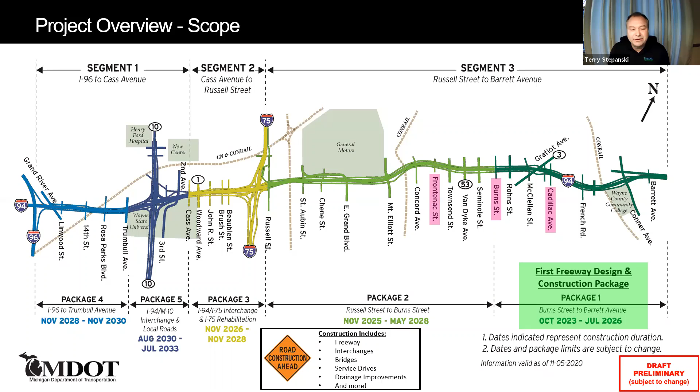One of the things we heard as we were working on the project is to increase connectivity. On the next slide, I'll talk a little bit about connectivity and what we're doing.

When we developed preliminary plans for the project, we focused on that very strongly. One of the things we're doing is constructing retaining walls along each side of the road. The previous rendering showed 3 lanes in each direction with narrow shoulders on each side. We're building vertical retaining walls on each side, excavating the earth, which gives us enough room to add lanes and wider shoulders.

From a bird's eye view, we really aren't making the footprint any bigger than it was originally. We're just using that same footprint in a more efficient manner. Stakeholder comments were so important here. We've been at this project a long time, and one thing we heard was that we needed to improve connectivity. So this project adds some bridges, which we call complete street bridges, that will accommodate pedestrians, motorists, and bicyclists, non-motorized traffic also.

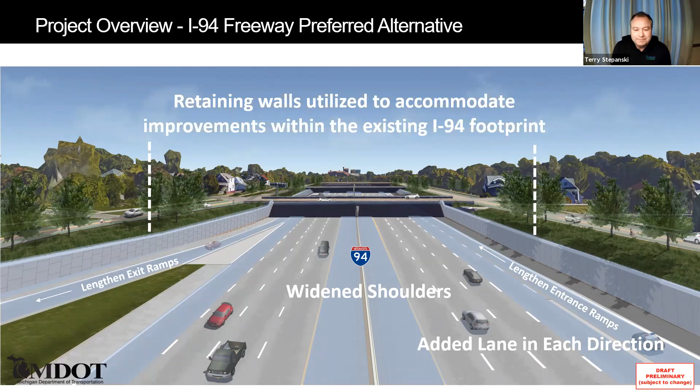On the next slide, we show that MDOT's been at this a long time. This is only a small segment of the entire project, showing the start of 2015 with the advanced bridges. We've really been at this project since the 1990s, doing work on it, and we had a conceptual plan back then.

As we updated our plans and met with stakeholders and talked to people, we realized we could improve on the conceptual plan we originally developed. So we continued our stakeholder engagement, took comments, and responded by modifying the plan. Our current plan includes greater connectivity and improved service roads. At one time we had continuous service roads throughout the entire corridor; we've modified those to only have service roads where needed, with more neighborhood areas along the freeway where that's most fitting, which fits in with the mayor's walkable community concept. So we've made those changes, and it really did help.

There was a lot of positive response from the public as a result of those changes. At one time, we had a lot of opposition to I-94, but as a result of listening to the public, making changes, and responding, this is an improved project that really fits into the community and meets the needs of the community.

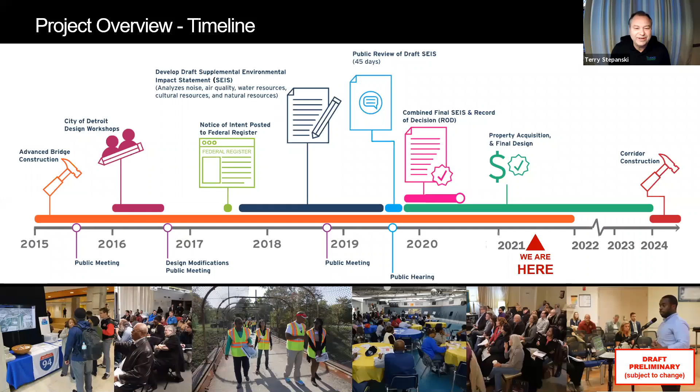Now we'll talk a little bit about the advanced bridges. This is some of the stakeholder engagement I mentioned previously, this collaboration with the city, and the city felt it's important that the bridges over I-94 provide connectivity and meet the needs of residents. So we do have bike lanes where applicable, and wider sidewalks accommodating vehicles, but they're not big wide bridges either where they're not necessary, or they're the right size to fit the approaching roads. We've had numerous discussions with stakeholders on that, so we certainly have it right.

Yeah, that's about it on that slide.

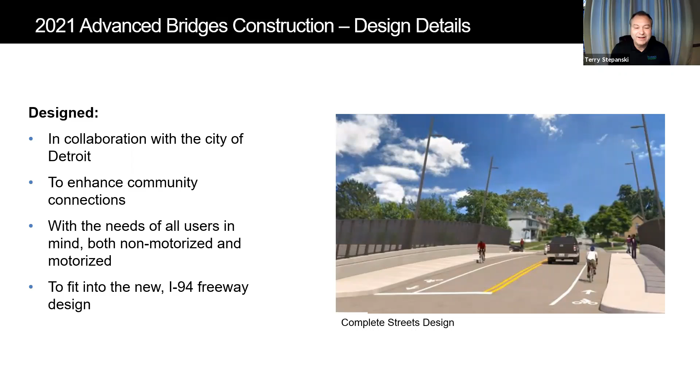Next, please. And what some other things I mentioned: the wider sidewalks, bike lanes, and blending into the community. And we do have decorative lighting up and down the corridor. You'll be seeing more and more of that as we move forward.

And another interesting thing, even on the aesthetics, we had a lot of stakeholder engagement workshops to seek input from the public just on how things should look. An interesting component of that is this constellation pattern you'll see on the walls of the bridges, and also when we build the retaining walls throughout the corridor, that they're in the shape of stars, representing the stellar navigation that was used by the Underground Railroad. So it's interesting, just a little backstory on where that came from.

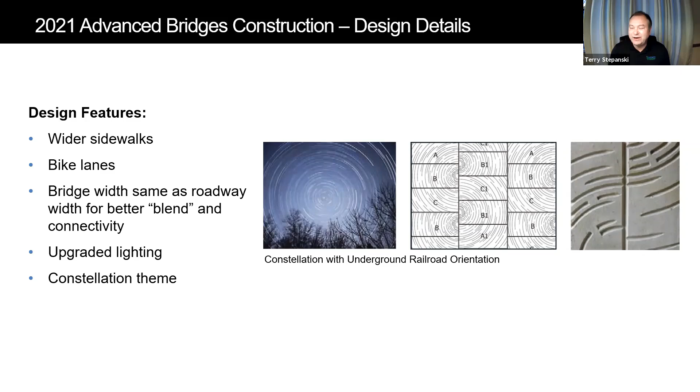So with that, we'll talk a little bit more about the details of the three bridges: Burns, Frontenac, and Cadillac. And I'll turn it over to Victor Judnic, our construction engineer, who'll be out there working to build these three bridges. Thank you, Terry.

Good evening, everyone. We are going to work, and we're getting a very early start on the three bridges, as Terry mentioned: Frontenac, Burns, and Cadillac, all over I-94. I'll just take a quick moment to mention the three bridges we're wrapping up from last year: Milwaukee Avenue over I-75, East Grand Boulevard over I-94, and Mount Elliott over 94. All three of those bridges will be open sometime this March.

So that's good news, we're starting early with the new three bridges. The reason we have to close those bridges now is because we're demoing Frontenac this weekend. We are going to be removing Burns next weekend, the following weekend, and we have a tentative date of the weekend of March 12th for the last one. Right now we're checking for asbestos, which has to be removed prior to demo. We have to take lights down, pull fencing, videotape sewers, videotape buildings, and put in vibration monitoring devices.

We're starting the fabrication of the beams of the new bridges that will be wrapping up in November. So the goal is we would open the traffic by Thanksgiving, and we hope to get there with these new three bridges, alongside opening the existing bridges we're still working on in March.

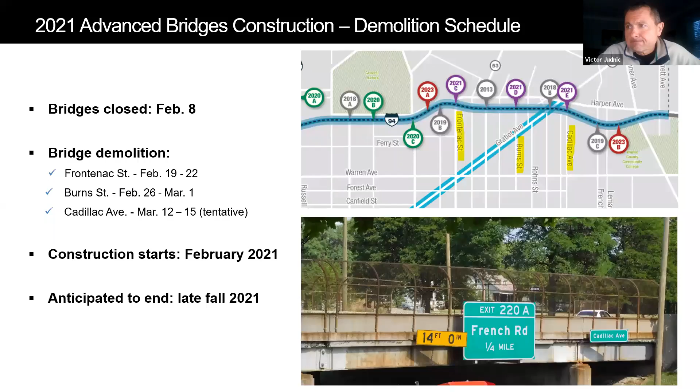Now this is a cross section, a slice of the bridges, what they look like existing and what they look like in the future. As Terry said, this is complete streets, where we've optimized, working with the city of Detroit, to keep the throughput of vehicles. We're not reducing vehicle traffic, but we're optimizing the space, adding bike lanes, widening the sidewalks, making the bridges friendlier for bikes, pedestrians, and vehicles.

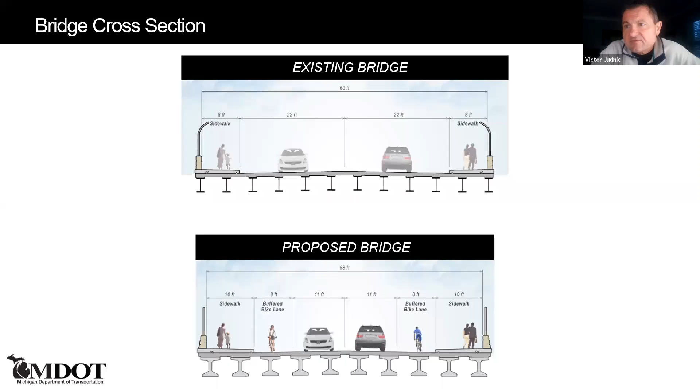I'm going to pass to our traffic expert, Mark Smith, who's going to give us a nice background on all the detouring that's going to be happening this year all around town. Go ahead, Mark. Thanks, Victor.

Yes, as Victor said, my name is Mark Smith, and I'm with HNTB on the I-94 project. As Victor mentioned, all three of these bridges will be closed for the summer, a full closure with detours for both pedestrians and vehicular traffic. There will be, out there in advance of the closures, turn-by-turn guidance for detouring traffic around those, and that is already set up and in place.

For the Frontenac Bridge closure, the detour that we have in place for both pedestrians and vehicular traffic is to use Concord, which is a bridge that we just recently constructed last year. In addition to the closure of Frontenac, the entrance ramp from Van Dyke to westbound I-94 will also need to be closed.

The reason for this closure is that while we're working on the bridges on I-94, we're making changes, widening the shoulders and shifting traffic around to maintain 3 lanes during all peak hours of travel. There will be some lane closures during off-peak times or during the weekends, but during your morning and afternoon commutes to and from work, there will be 3 lanes of traffic always open.

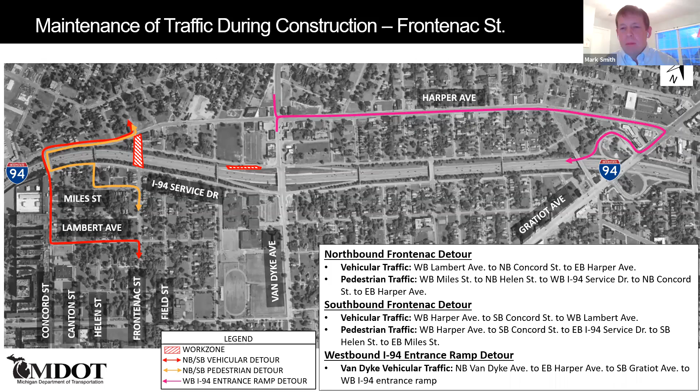For the Burns Bridge closure, again, the pedestrian traffic will be detoured to the west, and they will use the Van Dyke Bridge to cross I-94. For northbound traffic, the red arrow, we have them detoured over to Van Dyke, and the southbound traffic, the blue arrow, we have them detoured over to McClellan. Both bridges would obviously be open for northbound and southbound traffic. The detour signing is just placed in a way to eliminate left turns for the traffic crossing I-94.

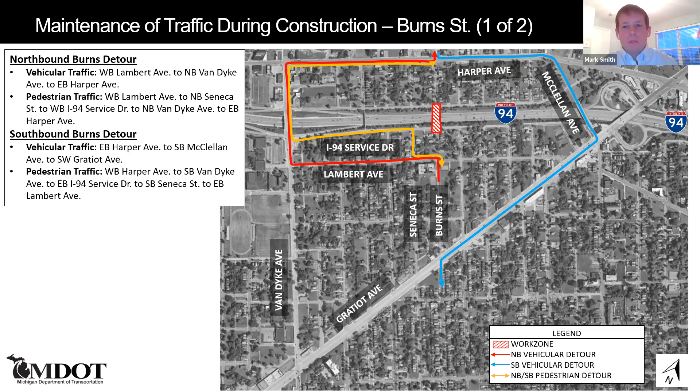With the Burns Bridge closure, there is another entrance ramp to I-94 impacted by this. This is the eastbound I-94 entrance ramp from Van Dyke. The detour we have in place for this ramp would be to take Harper to the east, and then you could enter the freeway at the Conner interchange.

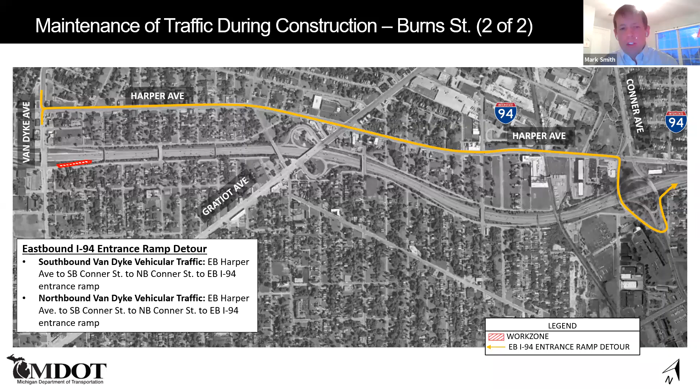For the Cadillac Bridge, again, the orange arrow here is showing the pedestrian detour, which would use the Gratiot Bridge, and the northbound detour for vehicles would use the Gratiot Bridge, and the southbound detour would use the French Road Bridge.

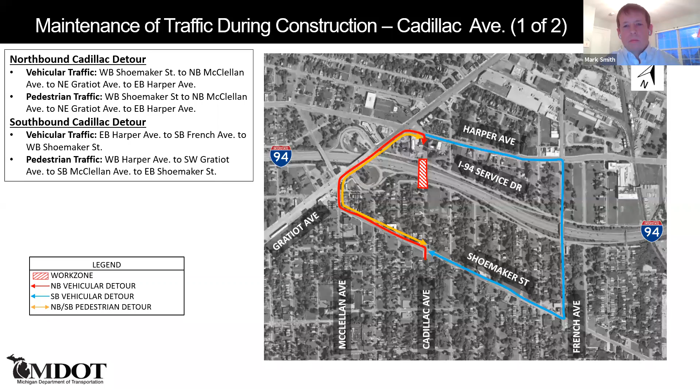Along with the closure at Cadillac, there are several ramps that are impacted. I'll walk through them, traveling on the eastbound side first of I-94. As you're approaching the Cadillac Bridge, the eastbound I-94 exit ramp to Gratiot, as well as the eastbound I-94 exit ramp to French Road, would both be closed. Traffic trying to exit the freeway at these ramps would be detoured to the Conner interchange, and then up to the north to use Harper to get back to French or Gratiot.

On the eastbound side as well, there will be a closure of the eastbound entrance ramp from Gratiot. This traffic would be detoured along Harper and directed to use the French Road entrance ramp. On the westbound side, the westbound I-94 entrance ramp from French will be closed, and that traffic is detoured over to the Gratiot entrance ramp to enter the freeway.

One more ramp closure on the westbound side, the westbound I-94 exit ramp to Gratiot. As you can see, the black arrow there, that traffic would be detoured to use the Van Dyke exit ramp and then come back to the east along Harper to get back to Gratiot.

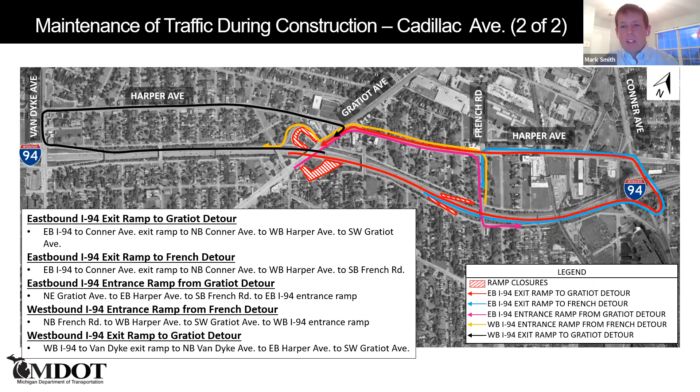Along with the other closures, as Victor mentioned, the bridge demolition this weekend and the following weekends, as well as setting bridge beams later this summer, the freeway will need to be closed. The freeway closure for these bridges will be between I-75 and Conner, with a posted detour route using I-75 to Gratiot and up to 8 Mile. It's important to note that traffic on the east side, or coming into the project on westbound I-94, would have access all the way down to the Conner interchange for local traffic. But the detour is signed up at 8 Mile really just to catch any traffic that is trying to get through the corridor.